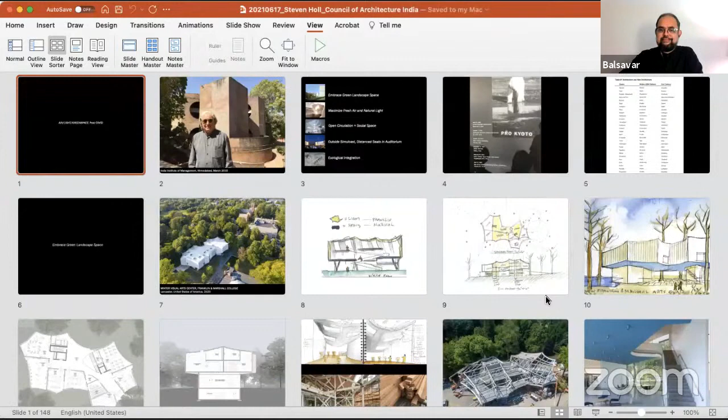I have first a slide, thanks to Doshi, who took me on amazing tours of Ahmedabad. And I also visited the Chandigarh sites during March 2015, when I was last in India. And I must say, I was very inspired by the architecture, and I'm really happy that we're getting the attention we need to these great monuments that everyone can enjoy in the future.

My talk is really about 5 points: embracing green landscape space, maximizing fresh air and natural light, open circulation and social space, outside simulcast, distance seating, and ecological integration. I call it post-COVID, but in a certain sense, it's what I've been working on my whole life. I've always felt the importance of air, light, and green space.

In fact, my ecological first effort, this lecture, by the way, has been given how many times? Like 10 times, and I keep changing it for each venue. So I made it special for India today. I have the Indian project, but I began on this kind of lecture effort to anchor ecological meaning in architecture back in 2001, 20 years ago, with a series of lectures on pro-Kyoto. That was when our president at that time rejected the Kyoto Protocol. So I went on the warpath and I formed my lectures around these ecological imperatives.

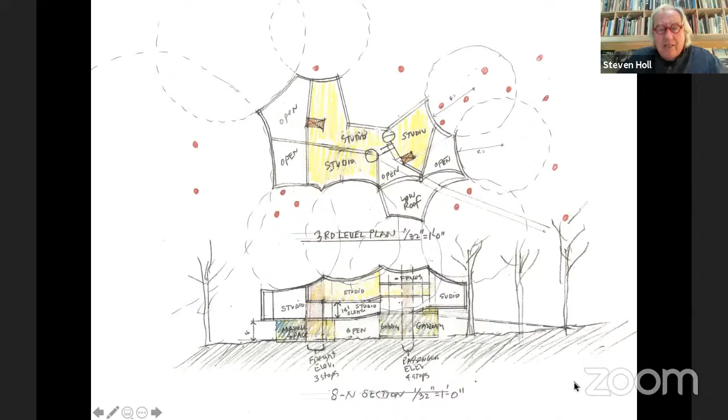And then I had a further elaboration, which is much more intelligent, and that is that these gigantic trees, some of them are 4 feet in diameter, and they're the oldest thing on the campus, that those trees would have an impact on the shape of this building. I had to double the size of a building that was on that site already, but we didn't remove any trees, and we allowed this building to actually take the concave and convex shapes of the trees around it.

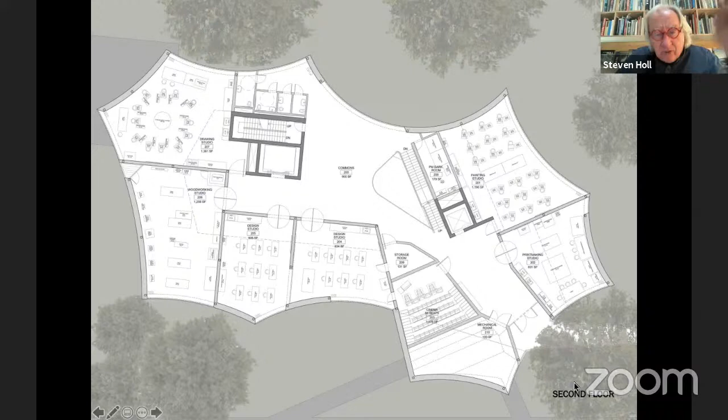So these are kind of my little watercolor sketches that the people in charge approved of. In fact, the president, when he saw that sketch about the trees, he said, "Brilliant, let's build it." So it was a great client. And there you can see the drawing studio, woodworking studio, design studio, and painting studio, an auditorium for cinema. They teach cinema there. This is the School of Art, and then other parts of the college will use these buildings. And there's a common space in the center that everybody shares.

It's built kind of like a box kite on a concrete base, and then the trusses up above are very lightweight and open. And the roof was done by local labor, the Amish, a very kind of interesting group of people, like the Quakers, who live nearby in Pennsylvania. It's Amish country. They still drive horse and buggies and dress in black. They don't believe in using electricity.

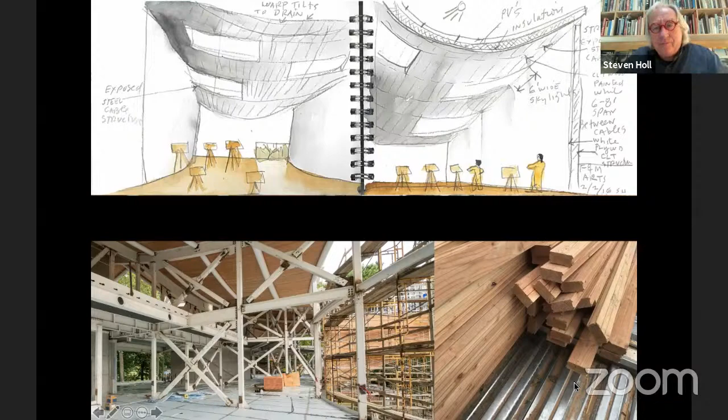But anyway, they came to put the roof in. So the whole roof was done by local Amish contractors. And there you see the building quickly going up like a frame, like a box kite, and there it's finished. That's just terrazzo ground concrete. There's glass between the two concrete base pieces because there's a park in the distance.

So there was a Buchanan Park, and it opens on one side to the Arts Quad and the other side to Buchanan Park. And there you see the exposed structure and the exposed wood by the Amish builders. And there you see the feeling of the trees changing the geometry of this building. And that's a water retention pond. It's a lower end of campus.

So I worked with the campus physical planning department, and I said, instead of dumping this water into the storm sewer of Lancaster, let's retain it and use it as a green recycling situation. So this water then becomes a reflecting pond for the project.

In 2007, the opening of the Nelson Atkins Museum was a long process of a competition. There you see the original 1933 building. We were competing against Tadao Ando, Christian de Portzamparc and Piner. There were like 6 architects competing. And I went to see the collection, which has a very amazing Asian collection. And this dates from the 11th century.

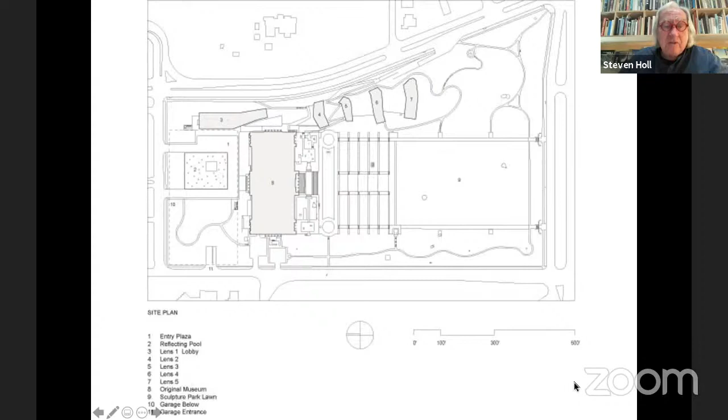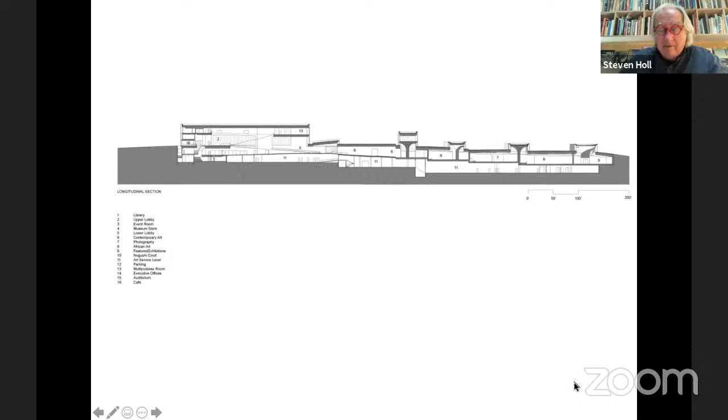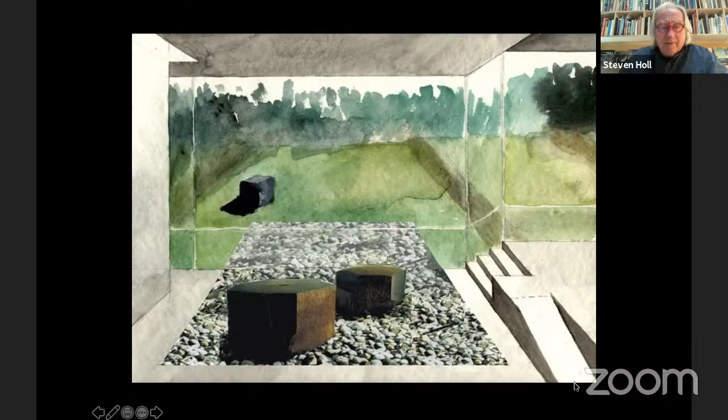And the building is then merging with the landscape. It's only in 2 levels, the service level below and the gallery level above, and the lenses that bring the light down. And a great collection of Noguchi. So one of the ideas was to integrate the landscape outside with the Noguchi piece on the inside. There you see the final installation of one of the Noguchi sculptures.

And it's a great place for social gatherings. This is before COVID, but you can imagine social distancing working fairly well in a great space like this outside. There you see the old original 1933 building and our new entrance pavilion, the lens number 1. Everything is connected below ground.

But one of the reasons we won the competition: all the other competitors built obediently up on the north side of the building. And we said, you shouldn't do that. You should go into the landscape.

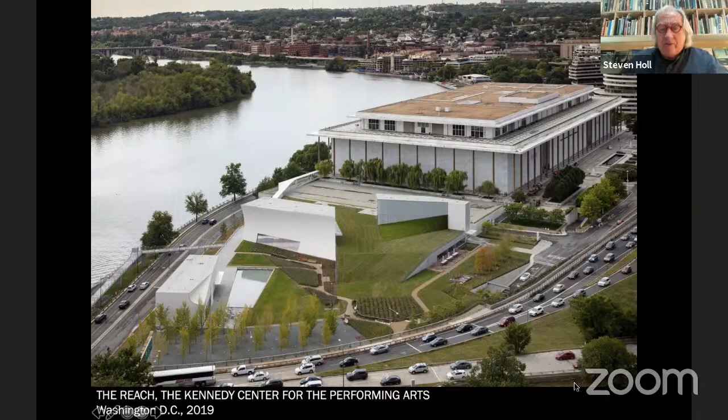A similar approach was taken when we entered the competition for the Kennedy Center. That was in 2012. There were 5 architects, Diller Scofidio, Pei Cobb Freed, Richard Meier, adding on a building that was done by Edward Durell Stone and opened in 1972. And we said, you shouldn't add directly onto the side of the building. You should, in fact, make a landscape, a new public space with this.

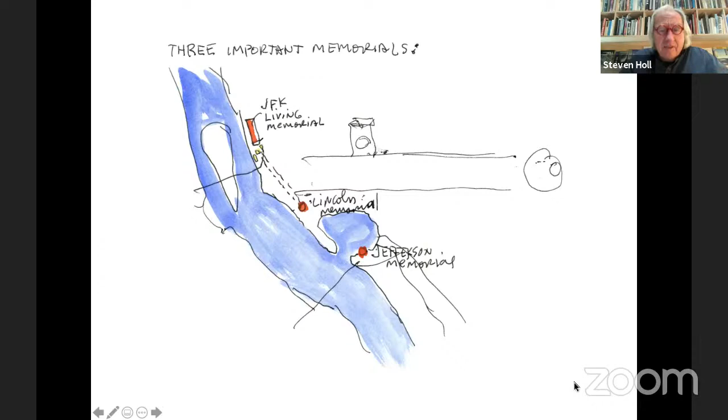This is a very important project, maybe the most difficult one that I've ever done in my life. You see the Jefferson Memorial, you can see it from here, and the Lincoln Memorial, you can see it from here, and it's the end of the mall. And this is a living memorial for JFK. Kennedy meant a lot to me in my life. I remember the day he was inaugurated, and who could forget the day that he was assassinated? A very important president, and it was a very important project.

The program was mostly for rehearsal space. The stage had to be the same size as the stage in the Opera House, very large. And then dance rehearsal studios, a lot of pragmatics that had to be accommodated. But we accommodated them below, and then we punctured the landscape with 3 pavilions: an entrance pavilion, a glissando pavilion, and a river pavilion. So you can see here the whole landscape then becomes a kind of monument to Kennedy.

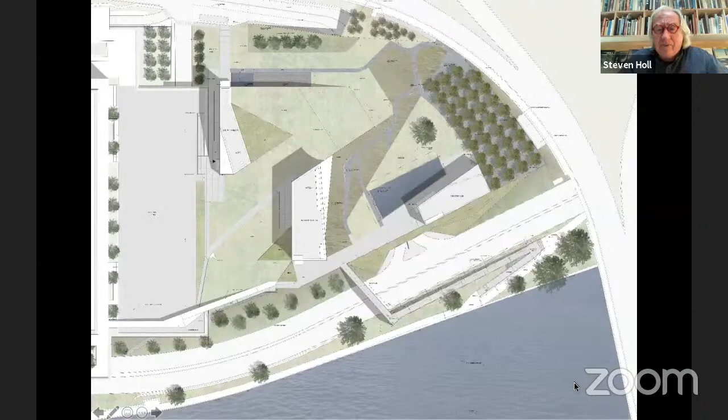35 ginkgo trees for his presidency. And the ginkgo tree is very famous, because in the month of November the golden yellow leaves form, and in Washington, D.C., because of the climate, they drop almost on the 22nd of November, the day he was assassinated. Mysterious trees. They're one of the most ancient trees. I wish I had a photograph. I should have had that in this slide.

Now you can see here how the program is accommodated below grade, and these different pavilions come up. There's the river pavilion.

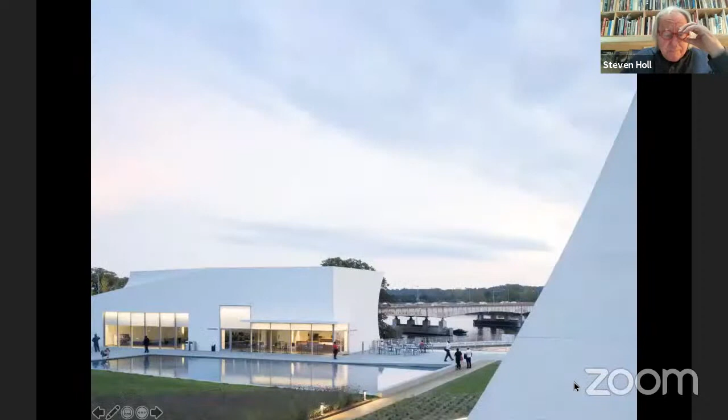Now you can see the river in the distance, the Potomac. There you see the Lincoln Memorial, and you can see here on the right the glissando pavilion has a big wall for simulcast projection. I'm going to talk about that a little bit later. There's my daughter walking around one of the reflecting pools at the opening, which was 2 years ago.

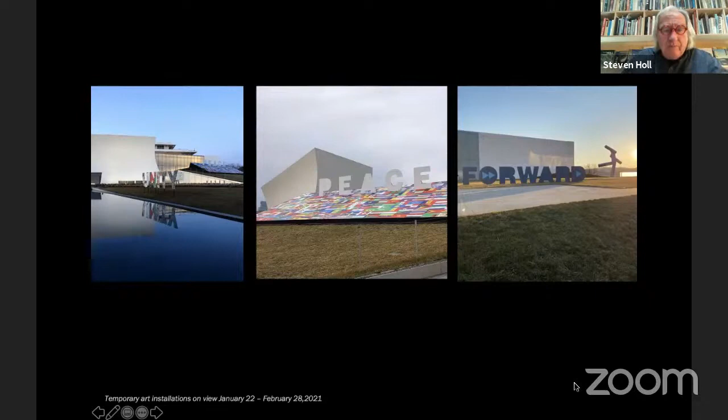And this has been constantly active during this whole terrible COVID period, because it has great outdoor space, great green space, great light and air. And even in winter, there was snowboarding down the slope of the landscape. So it's been a very active place.

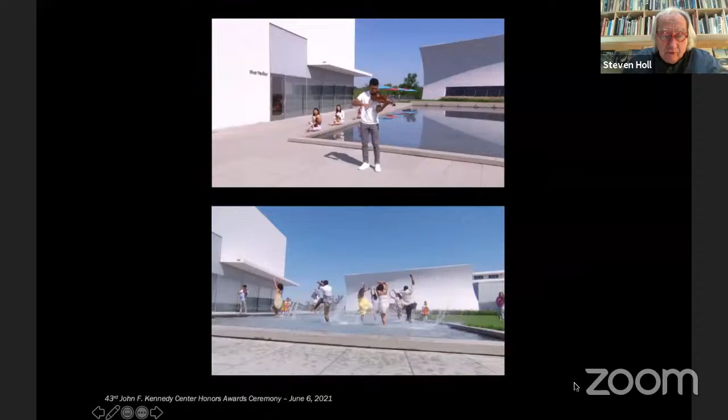And there was the Kennedy Awards, June 6th, just a week ago. And because of COVID, they couldn't have them in the big opera house. The performances were outside. So it was terrific. People called me up, sent me emails: Steven, is that your project on television? I said, yep, I'm very proud of that.

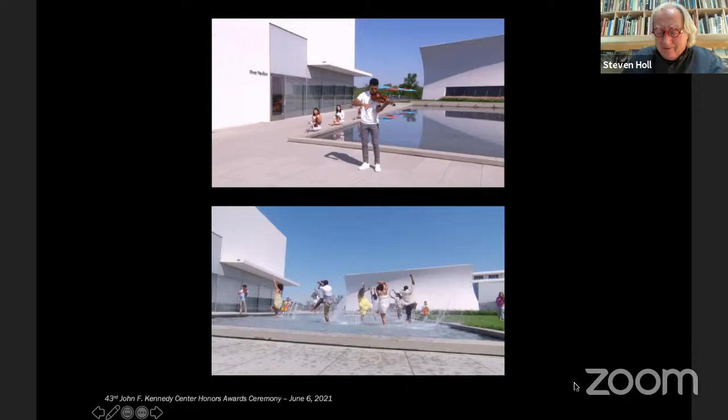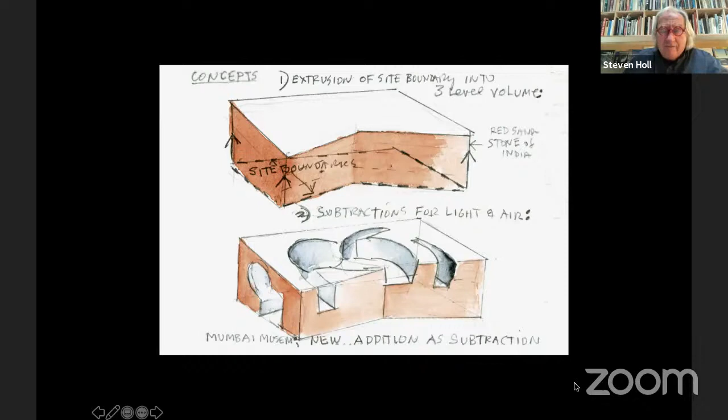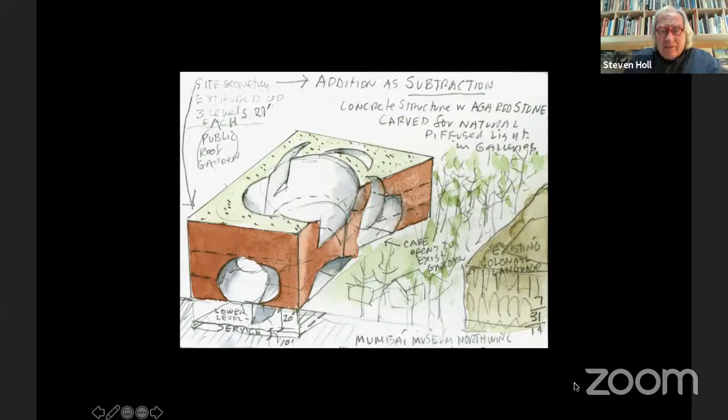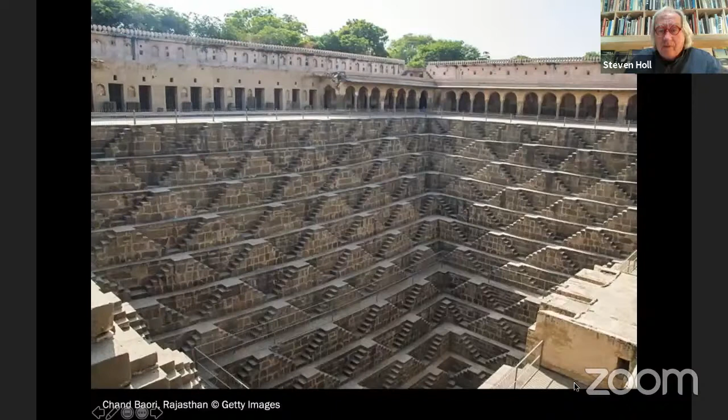And the idea really comes from what I believe is the most amazing architecture in India, and that is the stepwells. The stepwells are a brilliant subtractive architecture. And you can see the original building on the right. I did get a chance to visit a couple of stepwells when I was there, but one thing I want to do sometime in my life is to visit and document, or at least see them. I know there's a lot of ongoing documentation now, because I think some of these stepwells are some of the most amazing subtractive architecture on the planet.

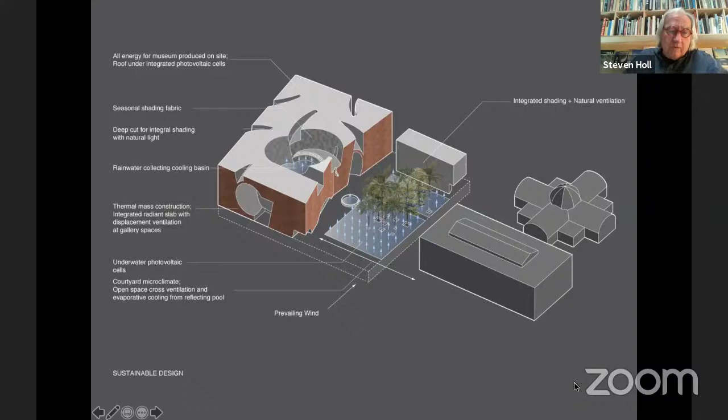And there was also a big ecological aspect. Matthias Schuler and we proposed underwater photovoltaic cells in this pool that connects the existing building and the new building. And Matthias did all the calculations for those. That would have been in 2014; if we would have been able to go forward, that would have been one of the first applications of underwater photovoltaics. One of the things about putting them underwater is they are cooled and they're kept free of dust, and that makes them much more efficient.

And then you can see all these energy ideas. That's all Matthias Schuler from Transsolar. There you see a section of the new building and the existing building. This would be a place for education for school children.

Education and art, I think, is incredibly important. Today, you know, we have new universities being built, and I was in one, I forget the name of it, giving a talk with Doshi when I was in India, and they didn't have any art programs. I think humanity is about art and science, not just science. So that's why I feel this is a very important project. Art education, enormously important. It's the spiritual side of humanity.

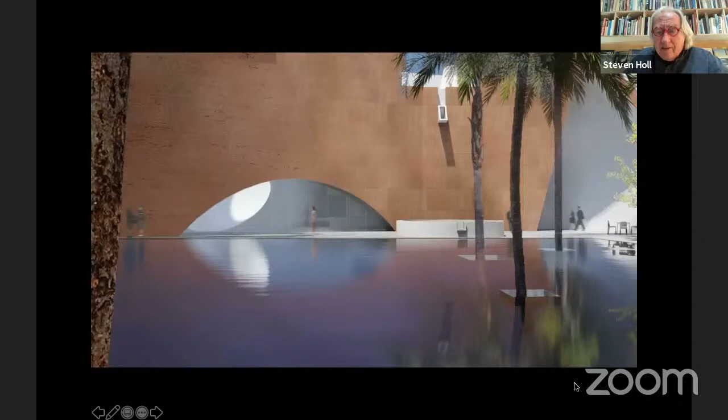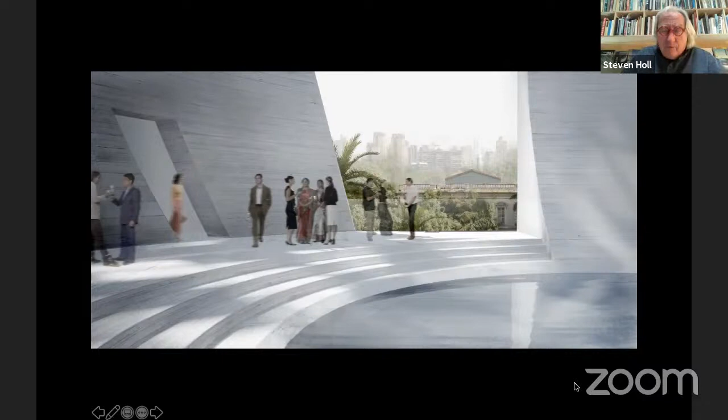Here you can see the photovoltaic pool and the trees that we proposed, the existing trees to save, and the lobby. This is all about subtraction and bringing light into the space and light into the gallery space. And then right at the top on the roof, there was a big monsoon collection pool that would be a perfect place for outdoor opening events.

This is a project in Bogota, Colombia, also a project that we want to build. We've been working on this project for 11 years now. All the working drawings are finished. I gave this lecture in Bogota to try to convince them to go forward.

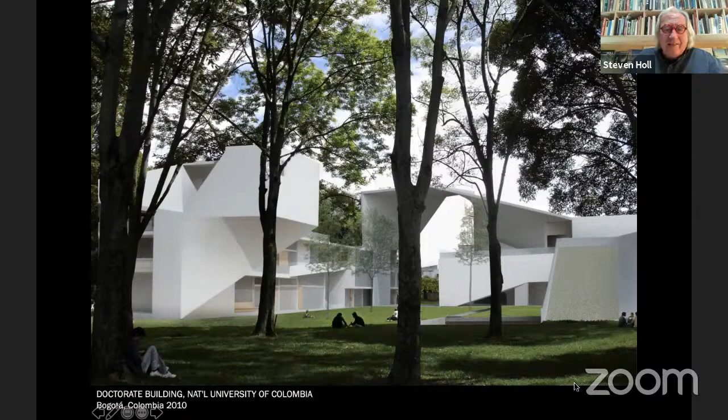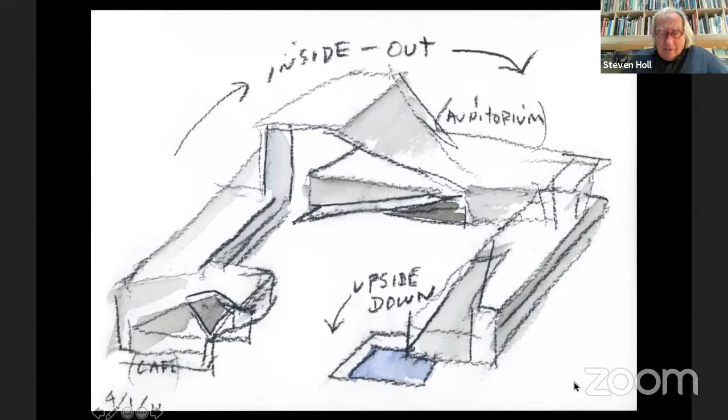It's a political problem at the chancellor level at the university, but it's ready to go. And it's a perfect example of light and air and green space. The whole building is based on a concept of inside out. In Bogota, because of the high elevation, it never gets to be more than 70 degrees. You know, it's a kind of constant, beautiful climate. You really don't need air conditioning or heating.

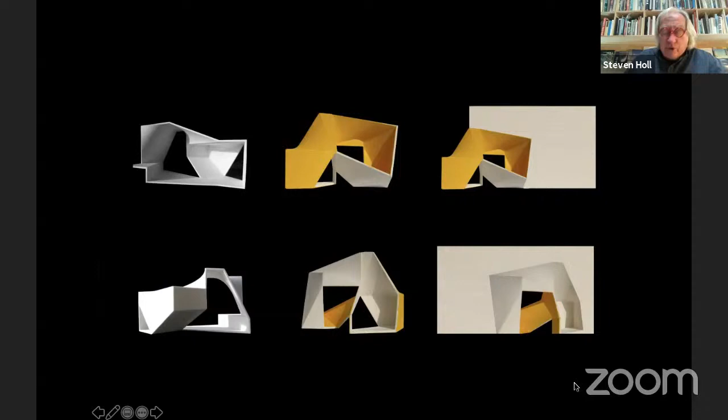So that was a perfect example of fresh air everywhere and inside out and upside down. And that was the concept. So that led us to a lot of study models, which I still love today, where you work about the idea of a kind of planar inversion, where there's an inside and there's an outside, and they reverse each other.

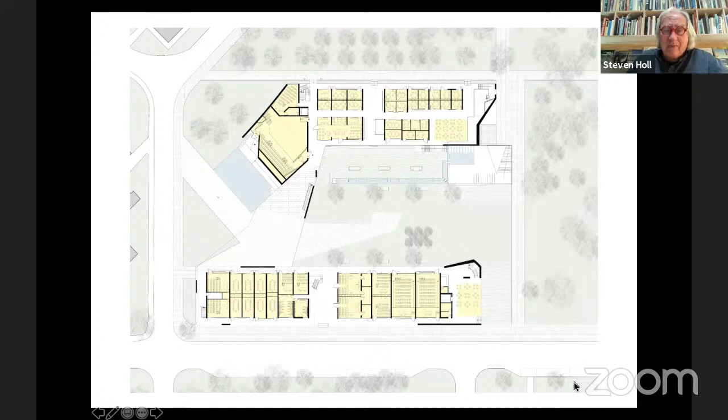And there you can see the classrooms, the conference rooms. They are all accessed on outdoor corridors with windows that open, and that big garden that's the heart and center, a quadrangle, a campus quadrangle, that's the center of this project.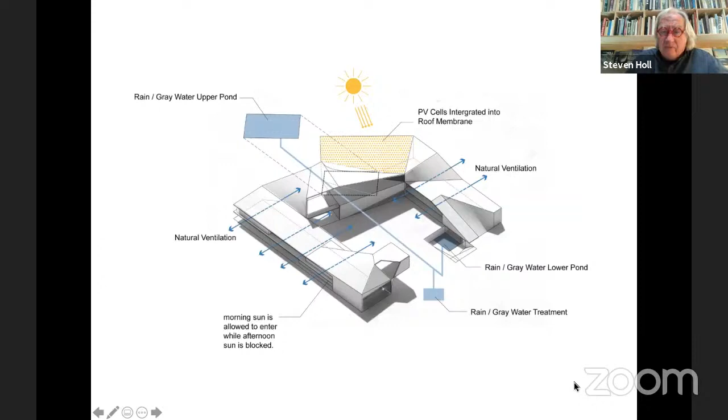And also it has gray water recycling, PV cells that provide all the electricity, natural ventilation to every part of the building. And that outside, I'm going to talk about in my last section here about outdoor projection. So from that large open loggia, which is the main entrance, you see also the cafe, which is suspended above in the distance. And both of these embrace that central quadrangle.

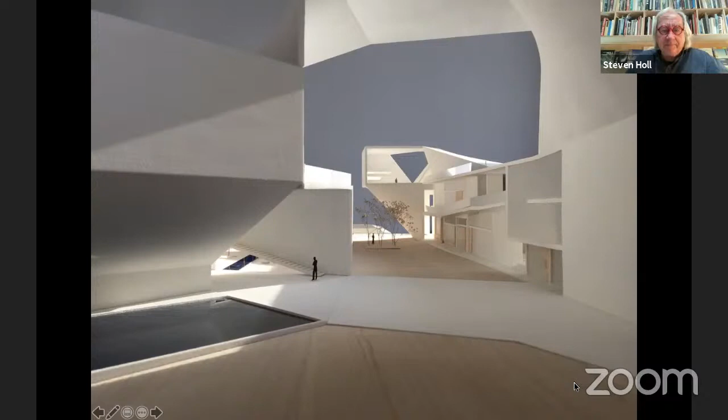A project that I'm very proud of, maybe this is my first project of any consequence. It's the void space, hinge space housing in Fukuoka. And I'm proud to say today it was almost awarded the 25-year award from the AIA as a great building, but the pyramid at the Louvre got it instead. But I got right up to the end because everybody loves it. It's still working very well.

And the whole idea was that all the access to these apartments was outside. Everything had fresh air. Water gardens divide them. So it's the void space that defines the project. There you can just see every one of these 28 apartments is different. And I won't go into the detail, but you can see the water gardens that divide them.

And there you can see, like a Chinese block, they fit together. Some of them are duplex. Some of them are integrated across the hall. And they're all accessed by outside corridors. You see one of the corridors with fresh air and light on the right-hand side.

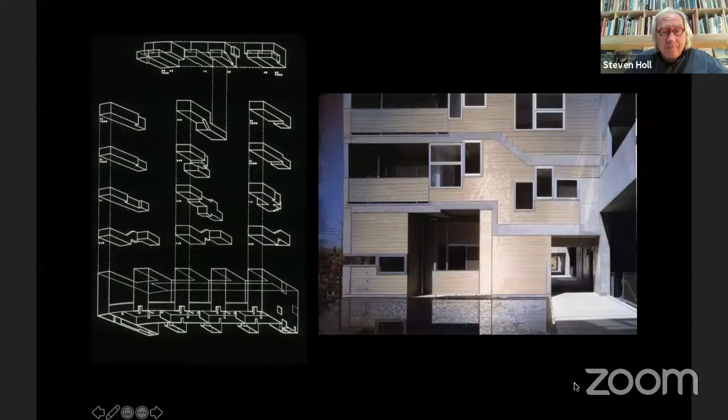So this is a really artistic commons building that David Rubenstein is giving. And it was a competition against OMA and Tod Williams and Billie Tsien, a number of different architects. And our simple concept was that it should stand for the intertwining of nature, science, mathematics, humanities, and the arts, the intertwining of all these aspects.

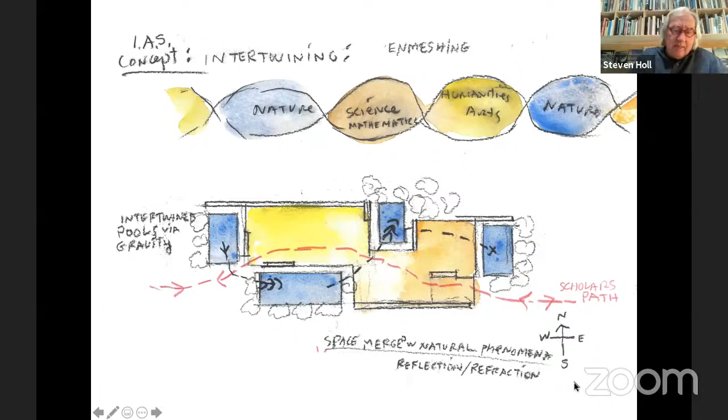So even though you would think they're dedicated to science, they really like this idea that the building would be a kind of weave. You see, there's 4 water gardens. And you can walk what I call the scholar's path from east to west. The parking is on the east. So you can walk into the main campus building through this building. And therefore also the notion of light.

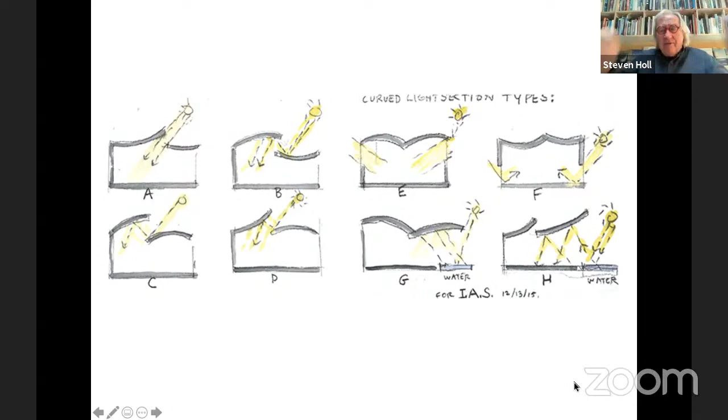It has a series of curved roofs that bring in natural light in different ways. And one of the things I noticed, I said to the director, all your recent buildings, the modern ones, they all have flat roofs, dead flat. The library is a kind of completely flat roof. And I said, I want to bring light in. I want these roofs to have, and then he said, oh, thought bubbles. He called them thought bubbles.

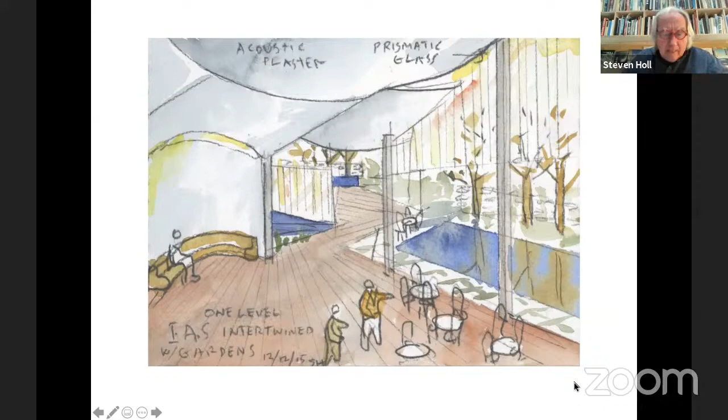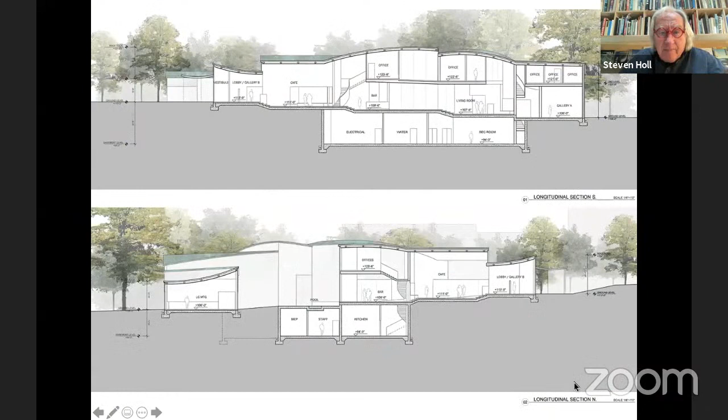There you can see the intertwining of these water gardens, there's a place in the building where you're walking through and you can see the water garden on each side. That was from the competition. And there's the finished plans, a large conference room, 2,000 square feet, cafe, a lounge, medium-sized conference rooms. Their program was quite elaborate and extensive. It's not a big building, but most of it is on the one level.

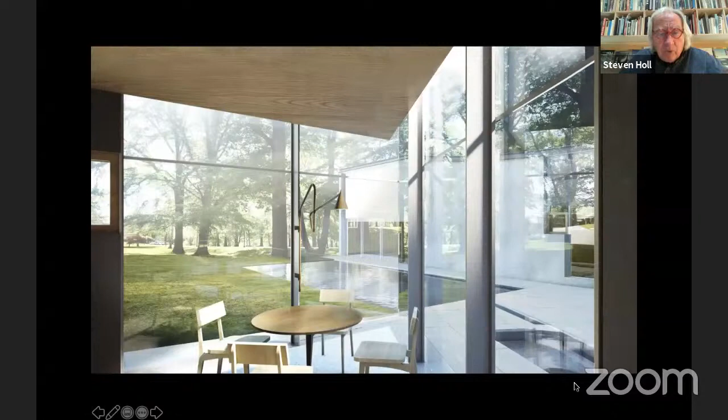And there's the cafe from the bar looking out to the water garden on the east. By the way, the entrance is called Einstein Drive. So when you're entering in the future, there's the full building with the Campanile, the original building. That's Einstein's office actually in the foreground. But when you're entering now this campus, you'll see the Commons building. Open circulation and social space.

This is a visual arts building at the University of Iowa, which we completed in 2016. And it was all the different layers of art. And it was a large building. And the site was very deep, 300 feet on a side. And I struggled with this because when we first started, they had a much more generous site, and it was easier to make green landscape and light and air to all the areas.

And slowly they shrunk the site, giving me only a footprint 300 feet on a side, and it had to be several levels to get the 140,000 square feet of program in it. So I started with this diagram, basically another subtractive project. I'm just thinking about it in the context of the India project, but it's basically a subtractive project where I cut this square and I call it multiple centers of light.

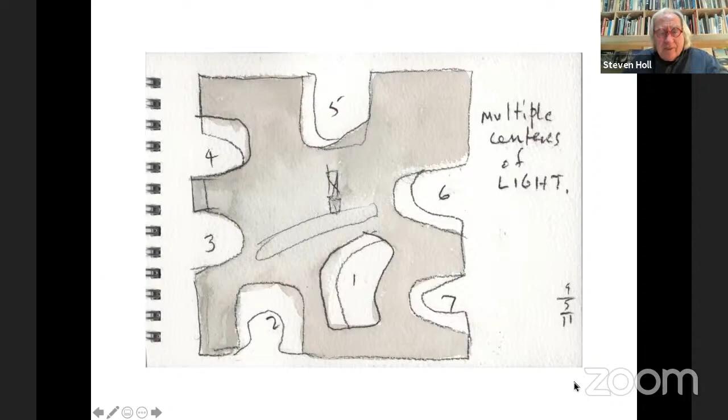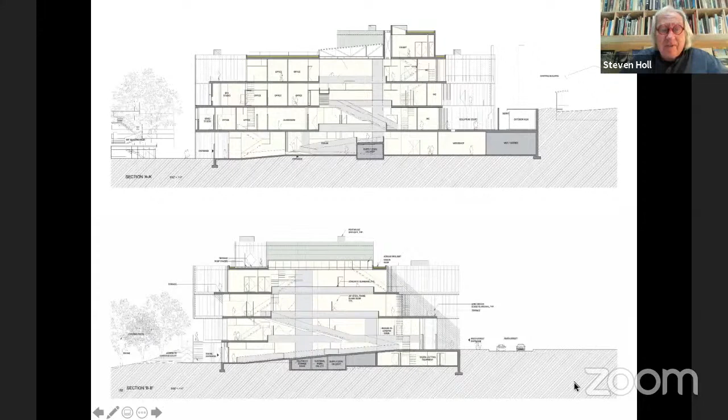And there's another drawing that's missing, but there's a laminar shift that occurs. You can see that it isn't a straight cut, that the whole building has a kind of laminar shift. Those two principles together are what form the architecture. There you can see all the different studios, painting studio, graphic studio, woodworking studio, printmaking studio. And you can see here that these cuts also have terraces because there's a laminar shift in the floor plates that allow these cuts to be very animated.

And you can walk through the building one end to the other. And that's actually how you enter the campus, this University of Iowa campus, 30,000 students, quite a large campus. And the dormitory site is on the uphill side. And you can walk down this slope and go out the other door. So you can pass by the exhibitions of the art department. So in a way, it's also bringing art to the forefront as you move through the campus.

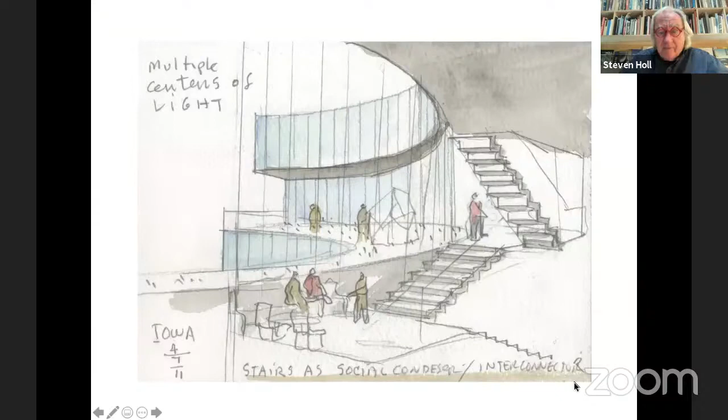There you see one of those multiple centers of light and how they become social condensers, because there's a place of terraces, of letting the light and air in, but also a place to stop that's not a classroom, to be on your computer or to just take a moment off, and then those pause places. So there's 7 of those.

And you can see that this building in the foreground is a building that we realized in 2007. And I struggled really hard about doing this new building because I thought at first it should be Cor-ten like our original building. Anyway, I went through something like 30 designs.

Do we have that little video? We don't have that in this.

Anyway, in another lecture, you will see I show how hard it is to have an idea that drives the design. I had 30 different schemes to get to this design, but that's not the point of this lecture.

This is a Maggie's Cancer Care Center. We opened that in London. Actually, it was opened on my birthday, December 9th, 2017. We opened this on my 70th birthday in London. And it's about making architecture something that has a healing dimension to it. And Charles Jencks, bless his soul, initiated those Maggie centers. There's something like 11 of them now. They're around the world by relatively famous architects.

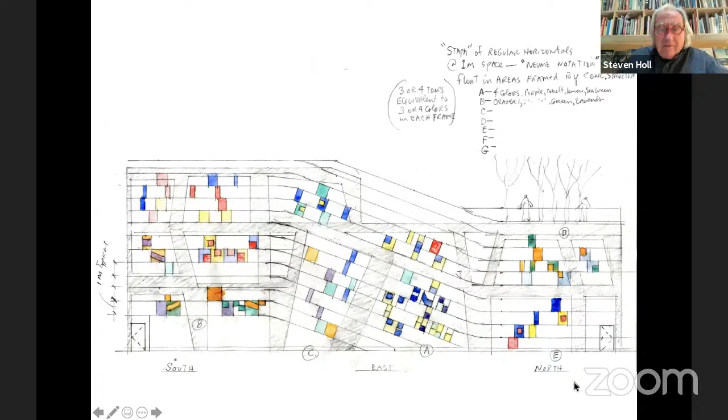So I took that as a kind of, let's say, point of departure to bring light and color. And I made the outer curtain wall into a kind of staff. And then we did small drawings of color that would be inserted in the new kind of stained glass called Okalux. It's a material that we developed with the Okalux company, so this kind of complication could be furthered in a different way. And it was an experiment, and it worked really, really well.

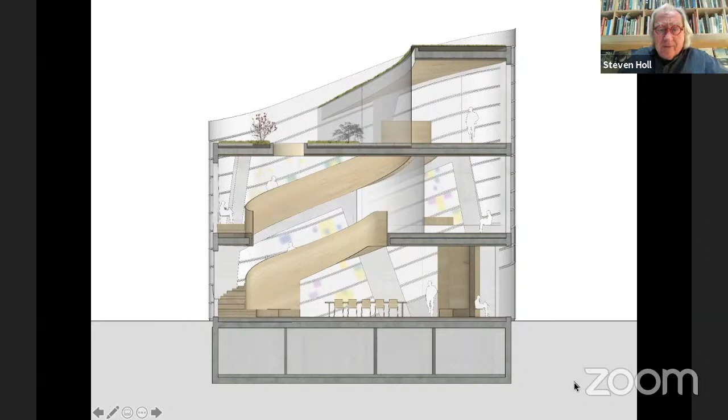You can see there the bamboo interior. You arrive at a garden at the top. The staff of steel, Arup did the engineering. It was very difficult, this curved staff. But there you see the inside where the colored Okalux notations glow from outside light, glowing on the inside. And there's the natural bamboo. And at night, it reverses itself. During the day, you really can't see the color from the outside. It's a very neutral building.

This is, by the way, a deeply historic section of London. That's a 1715 building on the left. There was much effort to block our project because of this. There was another building here that was a brick box from 1960, and we removed it. And I made the case that the quoins at the edges of this building hadn't been seen in 50 years, and they would be revealed when we turned the corner with our curves. Anyway, after something like 60 presentations, we got approval to build it.

And you can see here that it glows like a beacon at night. On a rainy November night, this thing is kind of glowing and the colors are glowing. There's doors on either side. It's a very inviting social space.

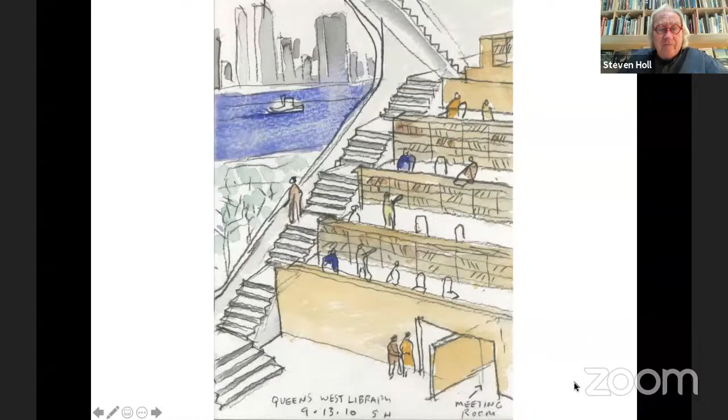This is a library we realized in 2019. You can see a lot of developer condominium towers in the background. There's more in the works. I wanted this building to be a public statement. It's a public community library, so we made it vertical instead of horizontal. And when we made it vertical, we saved the gardens for the public, and we gave a view to Manhattan to all the users in the building.

You can see here also the central idea of the problem of a library today, and that is the digital versus the book. Some of my students making libraries, they're so excited to say we have a bookless library. Okay. I don't think the book will ever die. And I think this whole digital versus the book silliness has kind of played itself out. But anyway, this drawing was from 2010, 11 years ago, at the height. I've been teaching at Columbia for many years, and we actually gave a library problem, or another studio did. And anyway, I wanted to balance this question.

So there are books. When you're looking here at your entrance, there's books on the face, and then there's computer desks behind it. So they're working on their computers on these different levels, but they're looking at books. And we kept the ground free. The building could have been done as a one-story building, but it would have covered the whole site, so then you wouldn't have this reading garden. And that's a State Parks building that forms the edge of that garden on the north.

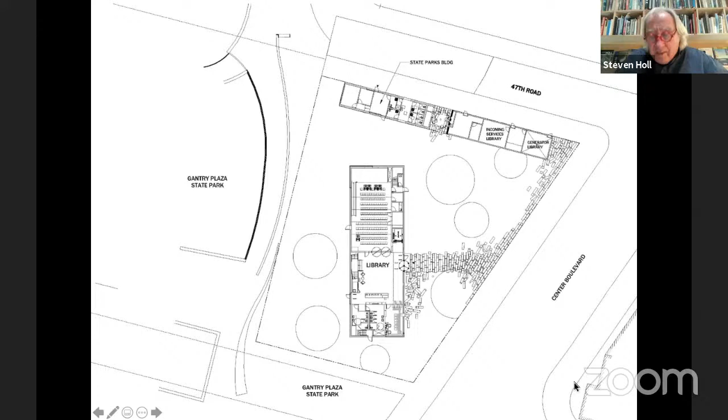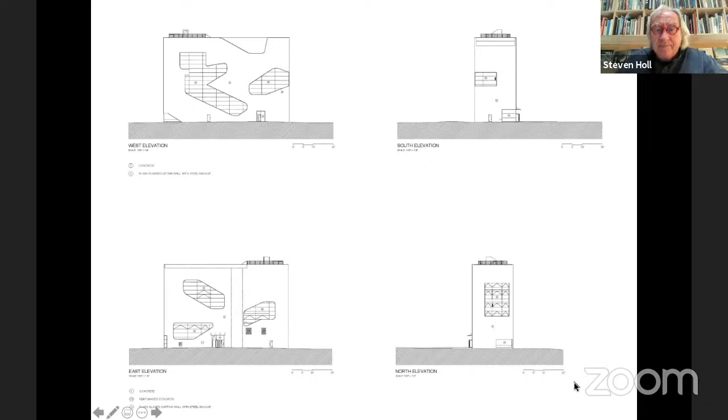And the cuts in the building, that's a structural facade. So the cuts echo the movement on the west side, that movement going up and looking to Manhattan. And on the east side, they tell you about the three parts of the program: the children's library, the teens library, and the adults library, which have to be acoustically separated. So when you're looking at the building, you're looking at a concrete structure that's just got aluminum stain on it. There's no curtain wall, and there are no columns in the building. So it's about the tectonics of architecture as well.

And a congressman by the name of Jimmy Van Bramer said, no, we want a public building that has an expression as architecture. So here's a case where a congressman, not an architect, has the foresight to understand that developers cannot drive our world today, which is happening. I mean, you look at Hudson Yards, what a terrible project. Developers are driving our world. We can't allow that to happen.

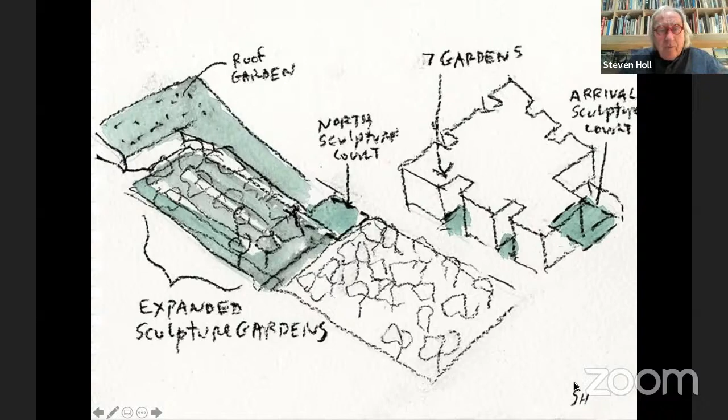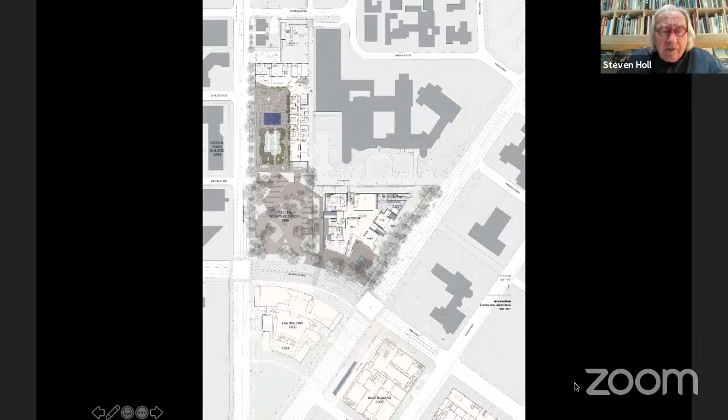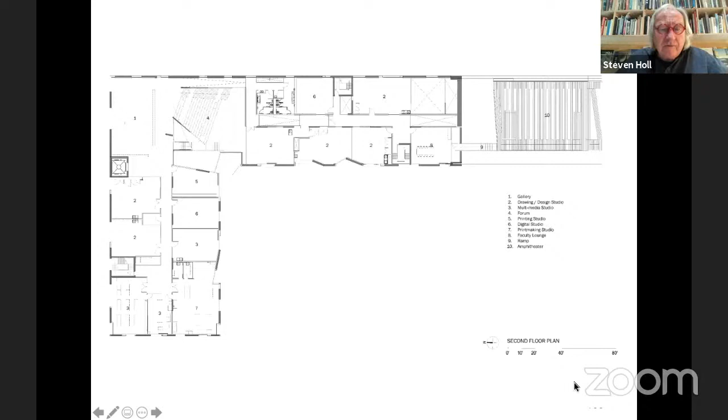And here it's all made out of precast concrete, and there are structural elements that hold the floors up. It's a simple L with a wonderful open forum in the middle of it. And these are sculpture studios, painting studios, classrooms. And there's that forum, that open forum that forms a space of unpredictable use. We've had weddings there already. There's a rap artist that does his rap music on those steps. I should have had a piece of that in this lecture, but that's another lecture.

And now everybody's very happy, because at COVID time, everybody wants to open the windows on both sides of the building and let the air blow through the building. And I really think that's a basic principle of architecture, and it should be supported no matter what. And it shouldn't be forgotten.

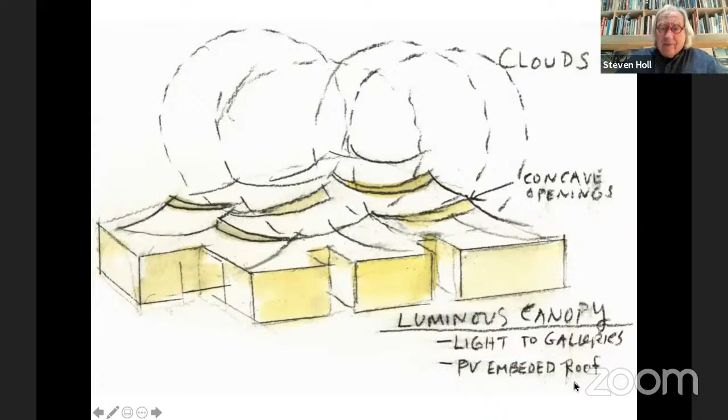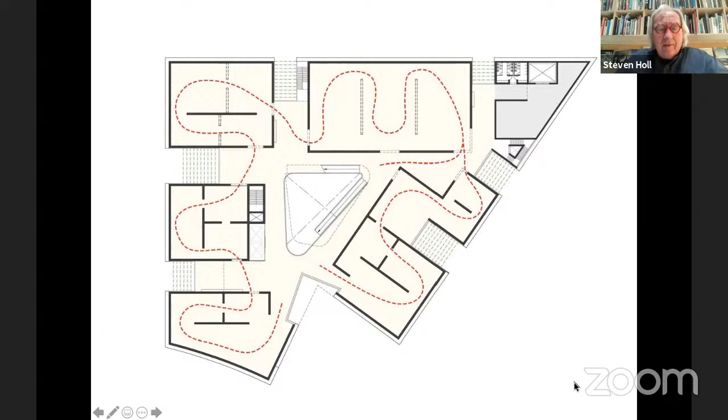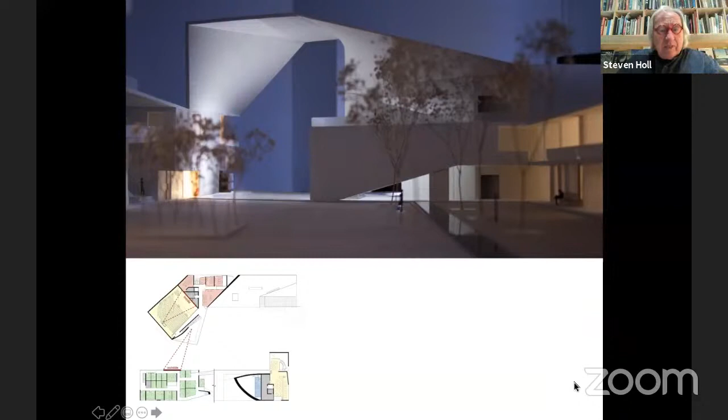But at the same moment, a simulcast, not a recording, but a simulcast, the public can come for free and see the opera or whatever it is that's going to go on there. And I think JFK would be very proud of that democratic offering. And we do a similar thing now at the Bogota doctorate building. In that great loggia on the outside, we propose a simulcast, and we open up the seating and make it less dense.

Ecological integration, that's something I've been doing with all my projects over the years, whether it's the first in the Linked Hybrid in Beijing, which we opened in 2009. It's a piece of a city. It has residents, it has shops, it has education, it has offices, it has cinema.

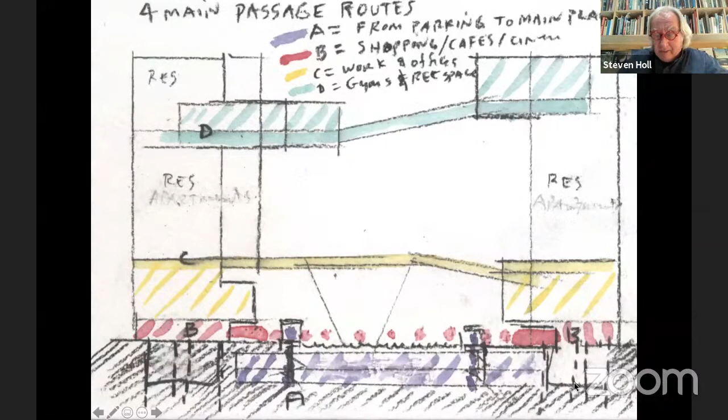There's a chunk of the city that allows you to live and work and recreate in one place. And it's the largest geothermal installation in China at the time. 660 geothermal wells, 100 meters deep. Nothing like that had ever been tried. All recycled water in the ponds. And I'm happy to say this thing is functioning perfectly. So it's heating and cooling 740 apartments.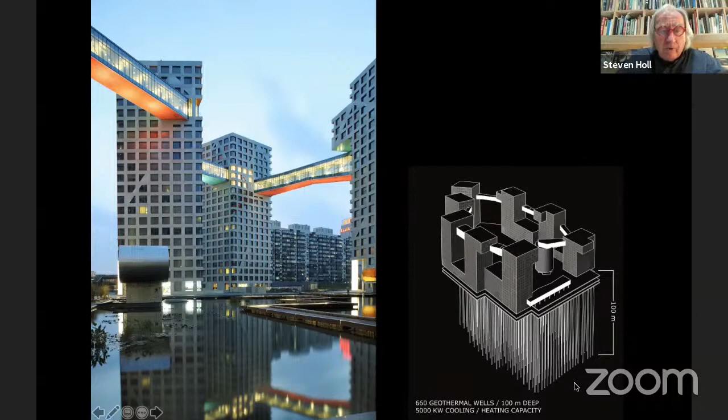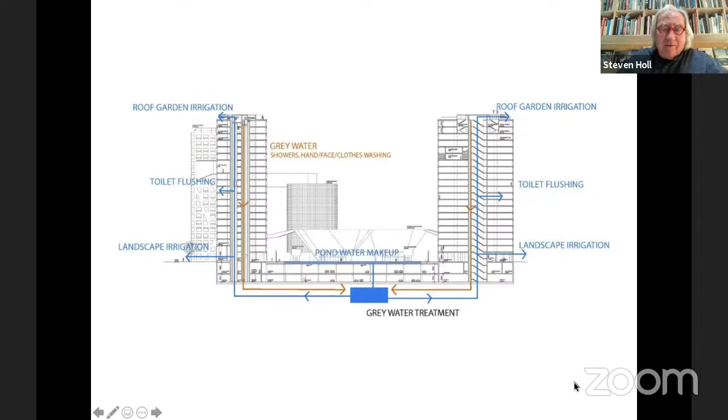There you see the gray water treatment, which was quite easy to do. I mean, it's plumbing to integrate all the gray water in a big project like this. But once you make this decision, which the client, called Modern Green, did, the treatment was basically an ultraviolet zapping system. And there's no smell. This water is absolutely amazing. I thought there might be a problem. I'd never done a gray water treatment at this scale, but it works perfectly.

Water is a kind of limited resource on our planet. All the water that was ever on the earth is still here, and that's all we have. So we have to think about water in the future as a kind of precious commodity. So I'm very proud of this gray water pond, pools that they can ice skate on in the wintertime, and they do. And it's a public space. So the ducks love it, the children love it. We have lily pads and lotus blossoms growing.

There's the Cinematheque that we proposed. The bridges have programs in them. That's for another lecture. This is a project I designed in 2006, an ecological dense pack on the edge of the Aegean Sea. And the housing collapse of 2008 killed the project, but just a month ago, it came alive again. That's a funny thing about being an architect. Now that I've been practicing for 40 years or more, sometimes a project that you did 10 years ago suddenly comes back alive. And this is happening right now in about 4 different sites. One in Helsinki, I'm not going to show you, and then this one in Turkey.

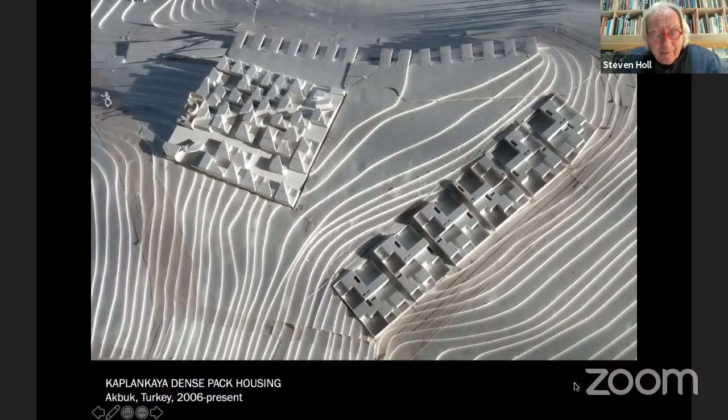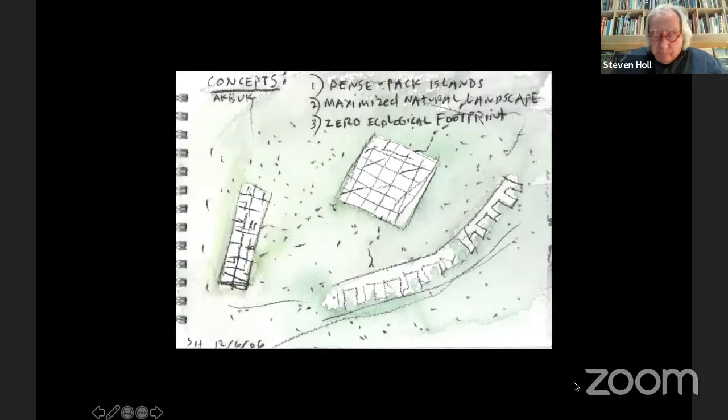And this site is near Miletus. There's the Aegean Sea. And Miletus is the oldest gridded city in Western history. It's an amazing place. Nothing's left of it, of course. I went to Didyma. There's a lot of ruins there, but there's not much left at Miletus. But the idea of the grid, the idea of a dense pack, that became my way of how can I preserve the landscape, do a maximum ecological project, and get this many houses on it. So it was the idea of dense pack, maximize natural landscape, and zero ecological footprint. There you see 2006, that's when that sketch came. And these are the different types. There are 3 different types of housing.

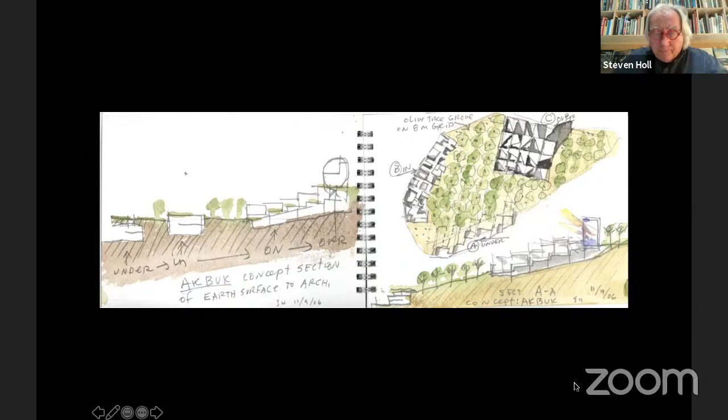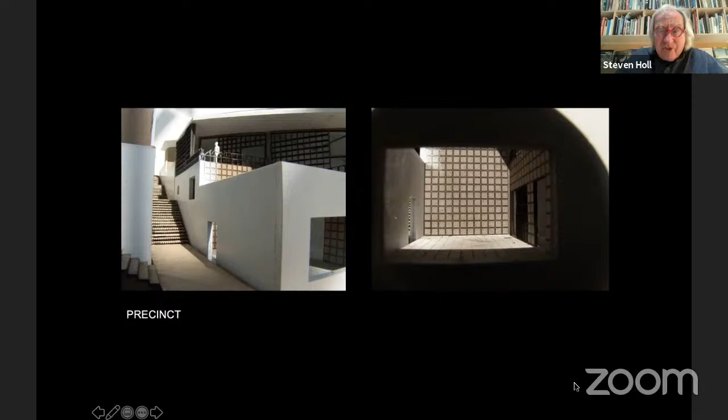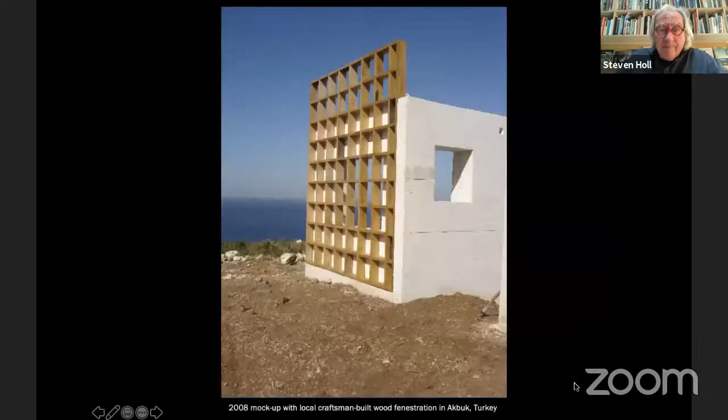And then we worked with Matthias Schuler, the one that did the Beijing Linked Hybrid, and he had many ways to get a net zero using the seawater, desalination, closed loop technical water. And we developed every house; all the working drawings of the project are finished. Every house has natural ventilation, natural shading, and this all had to be done. This was in 2006, throughout the day to reduce the sun and the glare. And we used all local materials. So we want to have local labor, and we use local stone, and then a kind of ash concrete, and local craftsmen built wood sunscreens.

And then in 2010, there was a terrible earthquake in Haiti, and I thought to do a pro bono project to house these people that were displaced. I mean, a million people were displaced in the 2010 earthquake. And I thought to use the principle of this dense pack. And actually, I had the foresight to understand that, and this is what happened. In the main towns like Port-au-Prince, they couldn't rebuild on the sites because of the political manipulations, eminent domain, and all this. The only thing you could do was build on a new site. So I said, let's make a site on the sea, and they would have views like that project. They would have views, and they would be south facing.

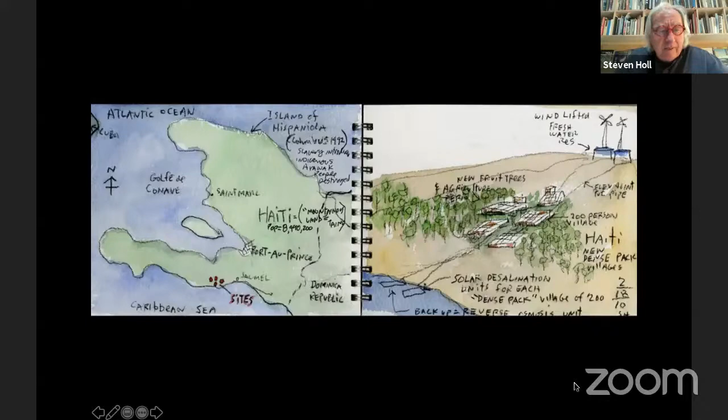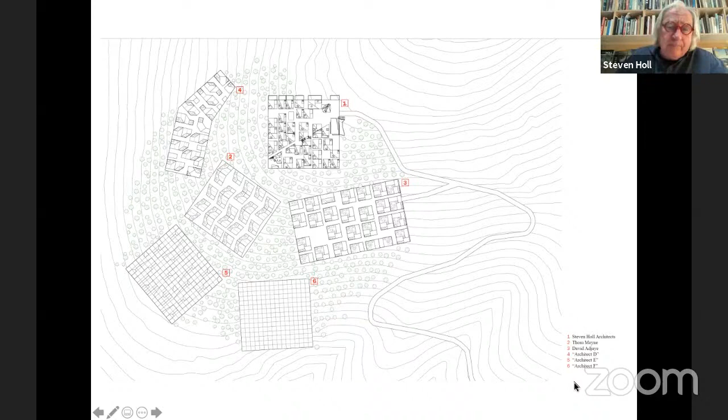And I would do the first one, Steven Holl Architects, and then my friend Thom Mayne would do another dense pack. David Adjaye would do another dense pack. I got them to agree. And at that point, I didn't have architect D, architect E, or architect F yet. But you get the principle. The principle is to dense pack, to get net zero. And all those principles could be reformed.

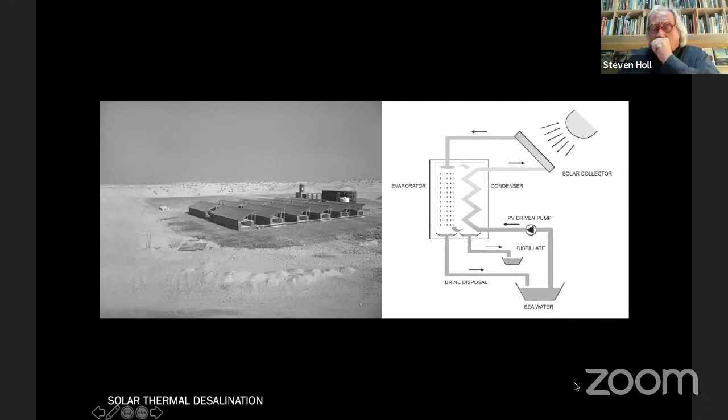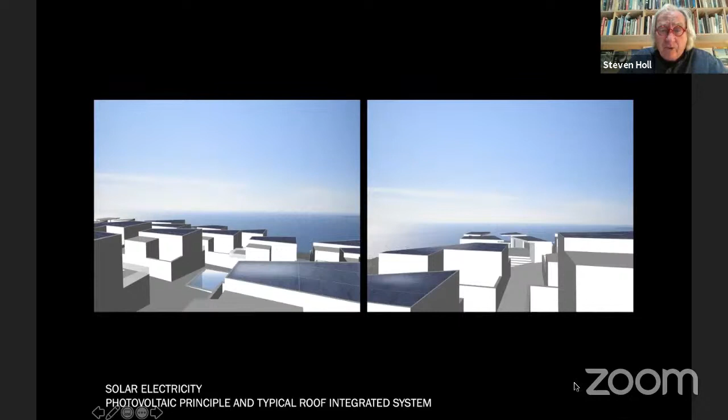And then we had solar thermal desalination. Matthias Schuler was heading up that part of it. All the electricity was provided by the photovoltaics on the roof, an integrated system. And we had solar cooking, and we had gray water treatment and compost toilets.

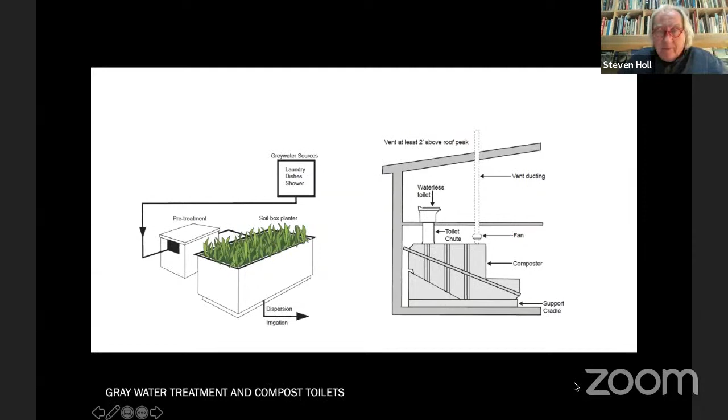So we didn't have the political will. Once we finished it, we made a pamphlet, we tried, but I think the politics is always the issue. Anyway, we were maximizing the local labor with the windows and doors. The structure was in recycled concrete. The skin would be painted colors and interiors by the inhabitants, so in a way they would be given individuation by the inhabitants. And I don't know if you've seen photographs of Haiti, but bright colors are common on the houses.

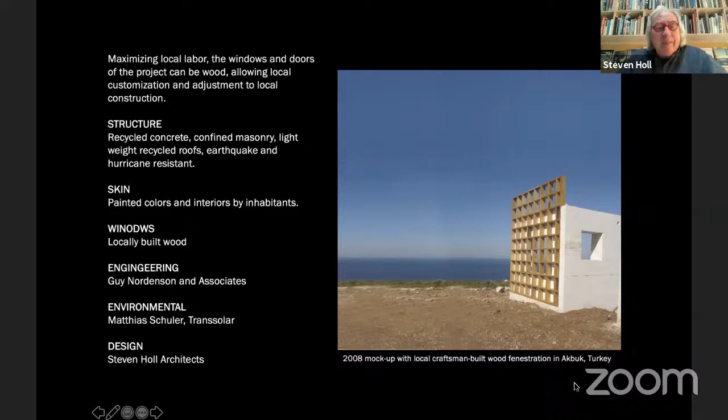And I'm sorry, we didn't put that image in here. I missed that one image, but anyway, that's the talk for today. And it's 11 o'clock. That was a perfect 1 hour. So I'm open for questions.

Thank you, Steven, for that fascinating presentation. And thank you for the message to young architects here in India and Southeast Asia to almost rediscover a new ecological balance. I think that's the underlying statement of the talk. So if we may begin, there are about 5 questions. I'll keep them short. I had them a little longer, but I've shortened them.

Landscape seems to be taking on a completely new role in all these projects, in the manner in which we inhabit them. At one point, you even mentioned that the Kennedy Center buildings were locked, and yet it was a very lively living space, because of the landscape and being the largest roof. That's right. And that redefinition of the landscape, the outside, so how would you elaborate this idea, speaking to young architects, on the new potential of the void, not of the built form? We've been so preoccupied with the built form. Absolutely. Very good question.